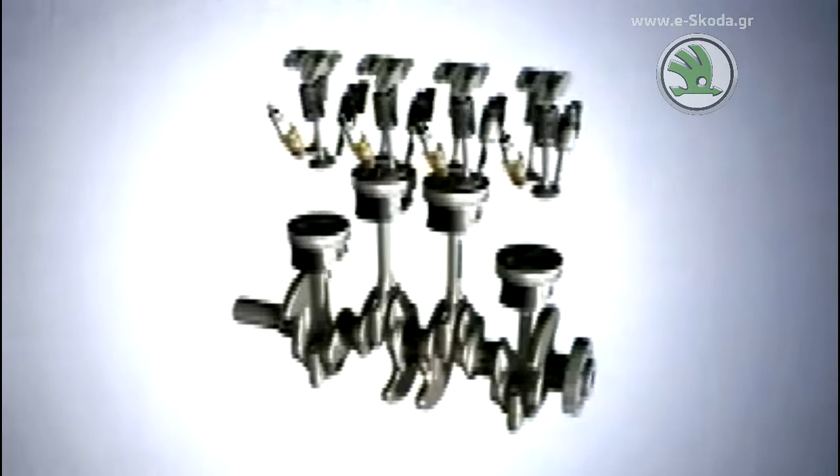Volkswagen's TSI engines, a spark of genius that has led to an impressive success story. And it continues with the 1.2-litre TSI engine with 77 kilowatts.

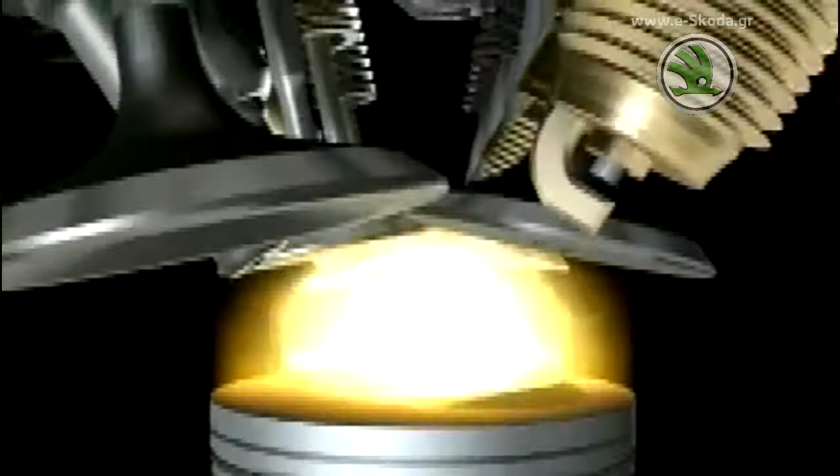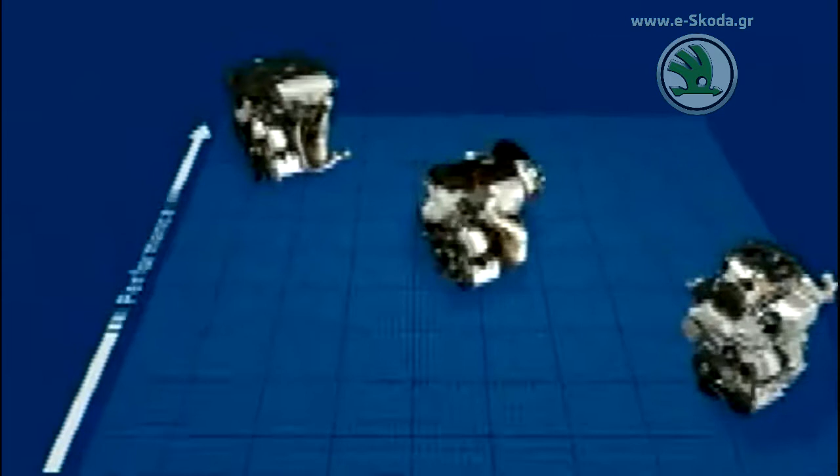High-torque engines with extremely low fuel consumption and minimal carbon dioxide emissions. It was by realizing this formula for success that the technological innovation from Wolfsburg achieved worldwide recognition in next to no time.

The 1.2-litre TSI engine with its output of 77 kilowatts now makes Volkswagen's technological revolution available for the entire range of Polo and Golf-class vehicles.

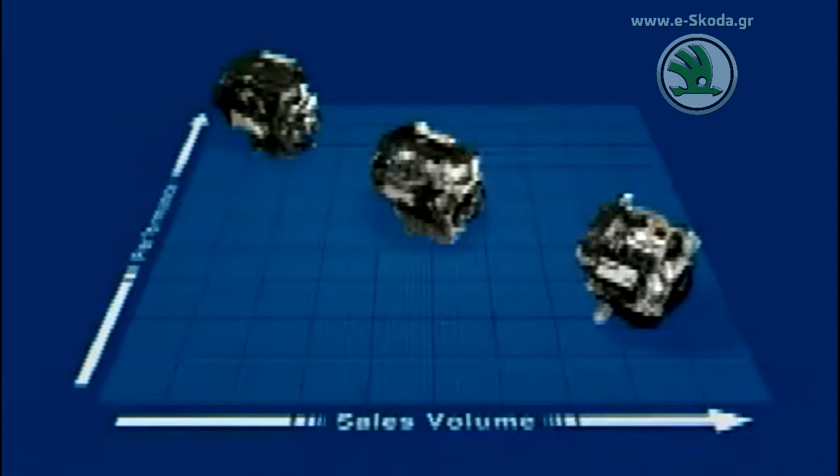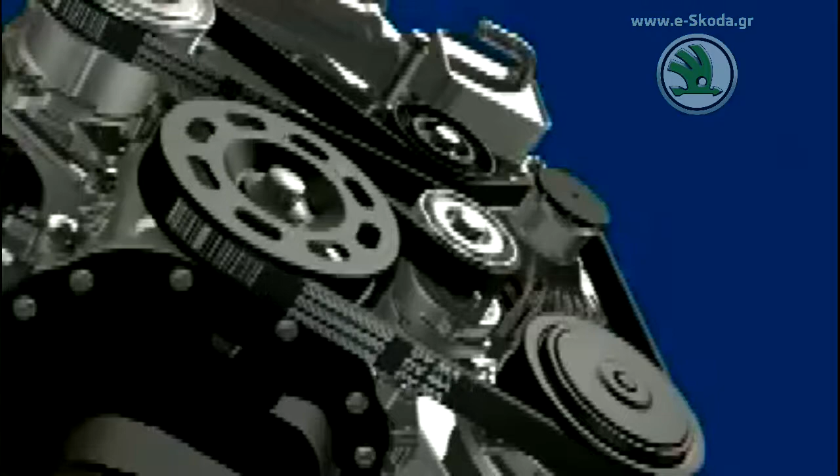In developing the 1.2-litre TSI from the small but powerful engine series EA111, Volkswagen's engineers focused rigorously on reducing frictional losses and on the use of modern lightweight materials.

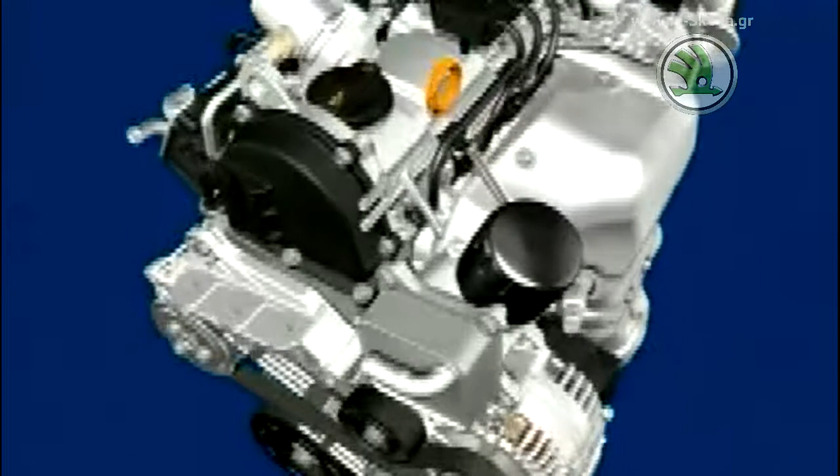The result was a new weight-optimized aluminium crankcase and a totally new combustion system. TSI technology design, which combines outstanding performance with fuel efficiency.

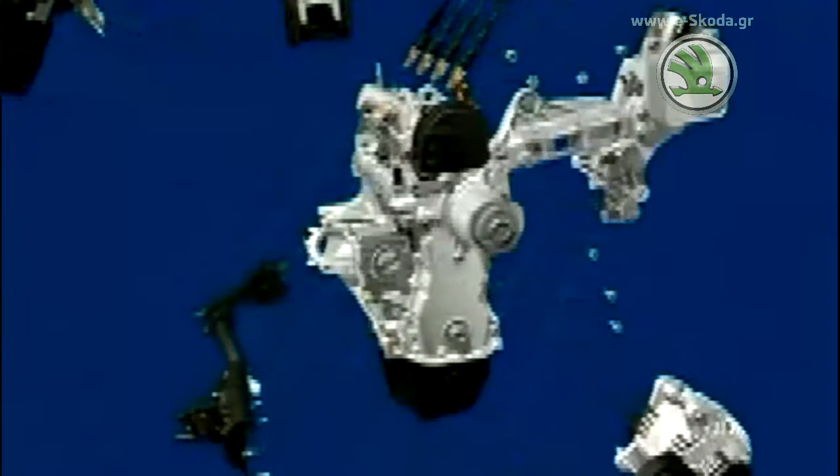The key innovations in detail: the new aluminium die-cast crankcase with innovative grey cast iron liners and an integrated oil separator system, for the first time also in a TSI engine by Volkswagen.

A revised timing chain case concept with two removable covers made of die-cast magnesium and plastic. The advantages: a marked reduction in weight, low system cost and low maintenance.

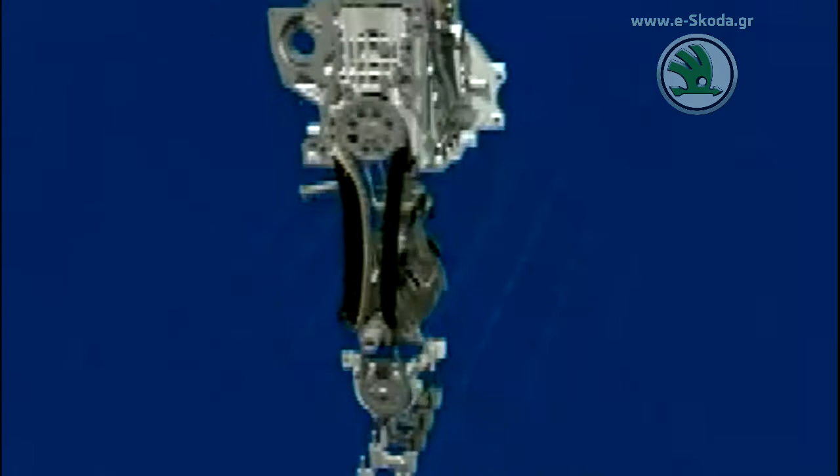Volkswagen's developers were able to minimize the engine's frictional losses by means of a range of innovative and intelligently complementary measures. In designing the new crankshaft, they resorted to the latest simulation technologies.

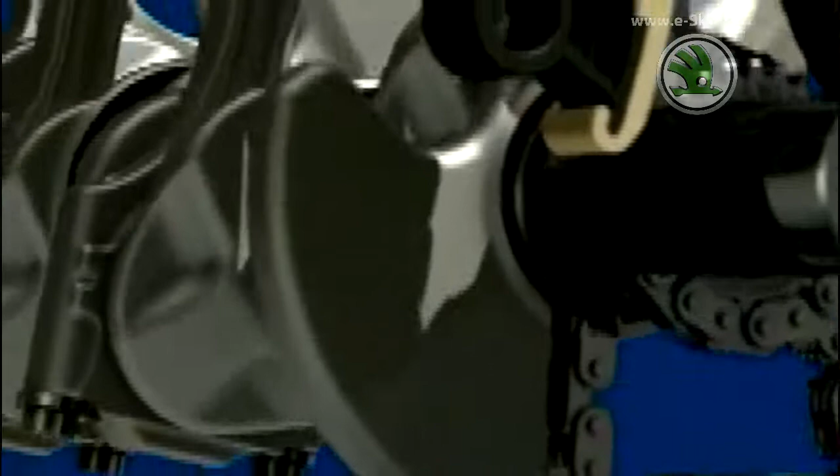This allowed the diameter of the main and big end bearings to be reduced to 42 millimeters. The result? Only minimal friction in the bearings. The optimal geometry and the decision to use steel led to a flexurally resistant crankshaft with excellent acoustic properties.

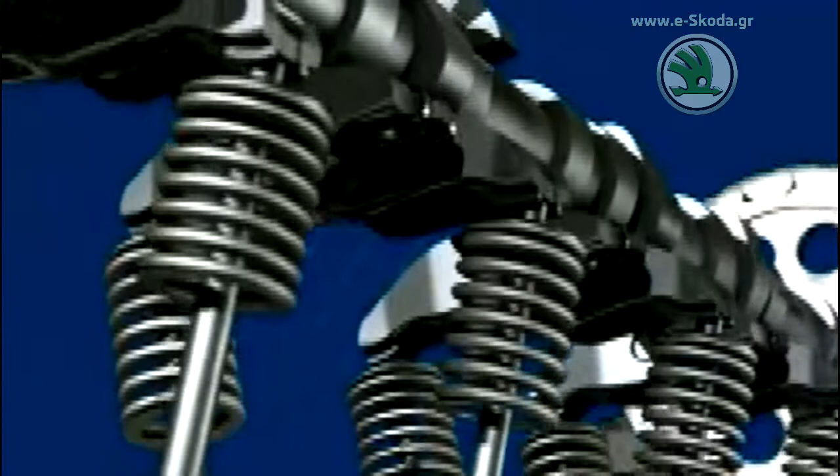The simplified 2V valve train with a single camshaft and small camshaft bearings permits a further reduction in friction, whilst ensuring optimal breathing efficiency for the small TSI engine.

Developing the world's first entirely new 2V direct injection combustion process with the typical response of a TSI posed a special challenge to Volkswagen's engineers.

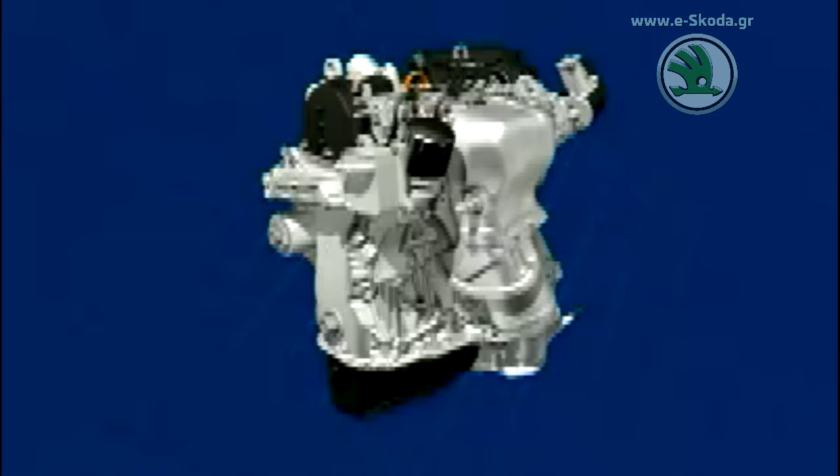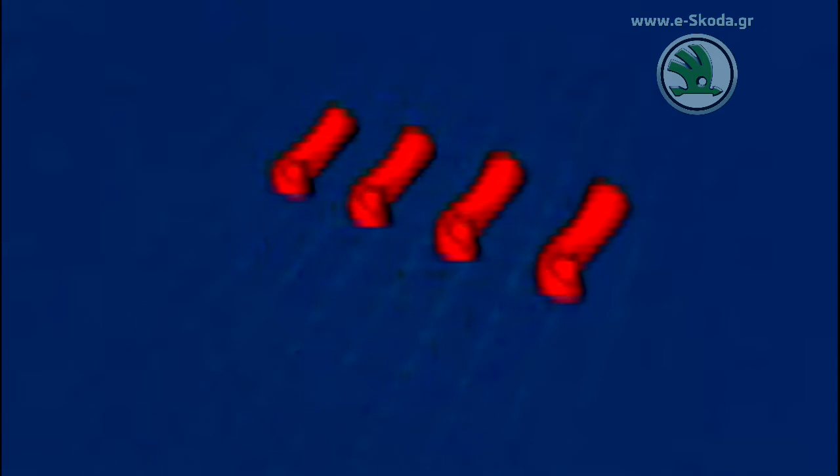First of all, they had to model the optimum swirl duct for an efficient swirl combustion process. Starting with a basic duct, 6 geometrical parameters of the intake port were continuously varied until the ideal values had been determined in terms of fuel economy, smooth running and emissions.

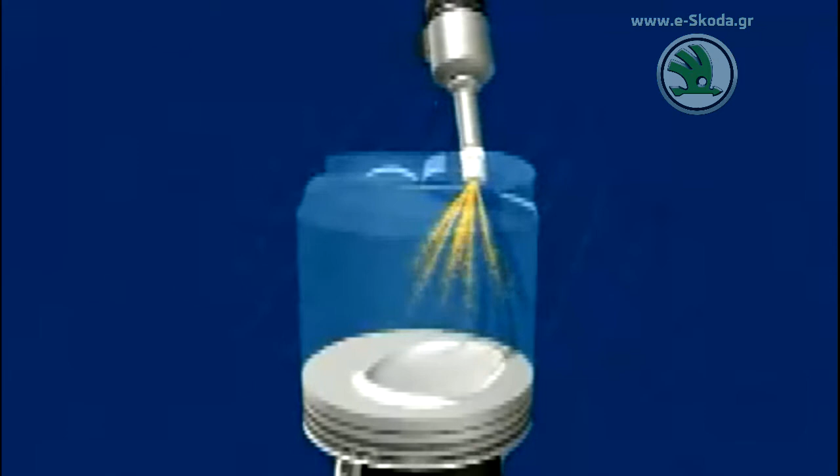The high-pressure injection valve, crucial for creating the ideal mixture formation. The latest generation of the multi-hole injector, with improved dynamics and more accurate volume control, ensures virtually perfect spray geometry while minimizing the injection time.

An innovative engine like the 1.2-litre TSI requires its designers to come up with innovative solutions in all areas, not least when it comes to the charging process.

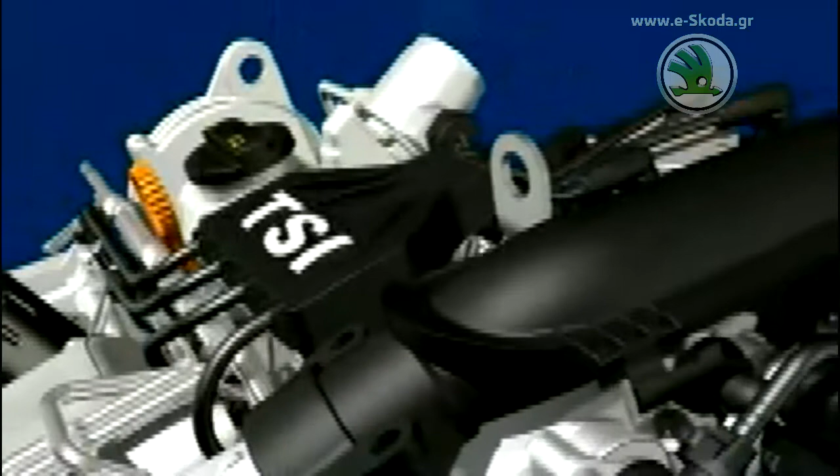The demands for the thermodynamics of the turbocharger are particularly high for the smallest in Volkswagen's TSI family, because of the ambitious fuel economy and performance targets.

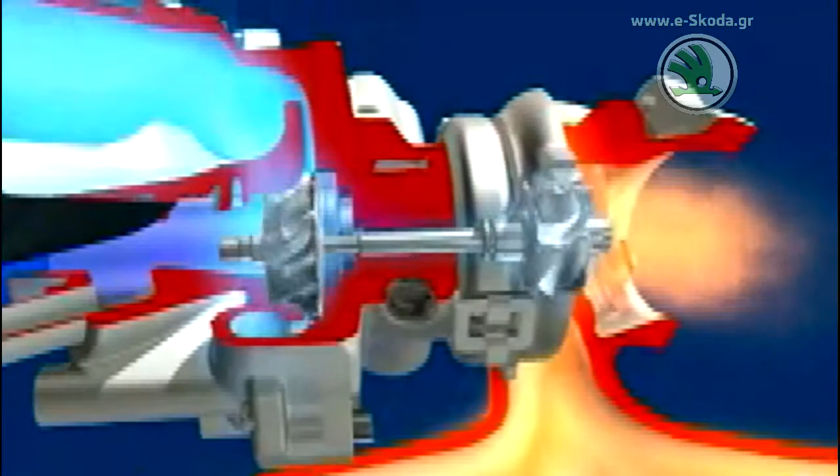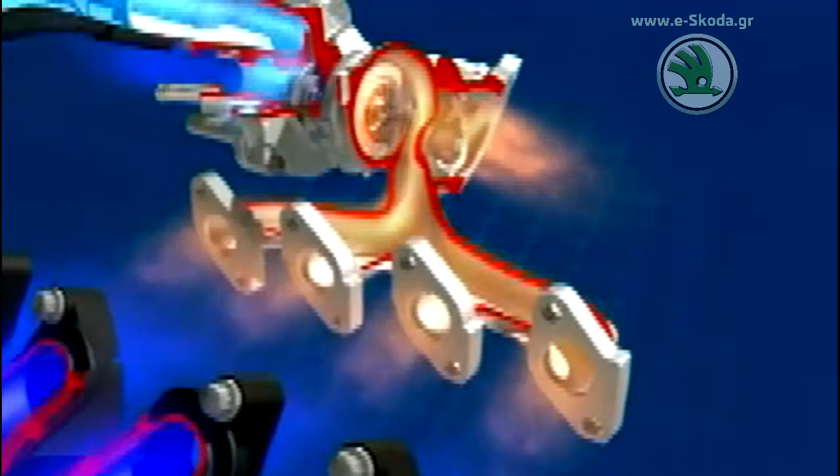At the turbine end, the developers opted for a mixed flow turbine with a low moment of inertia and high dynamic range of engine speeds. The single-piece exhaust manifold was optimized for minimum pressure loss and maximum utilization of the exhaust energy.

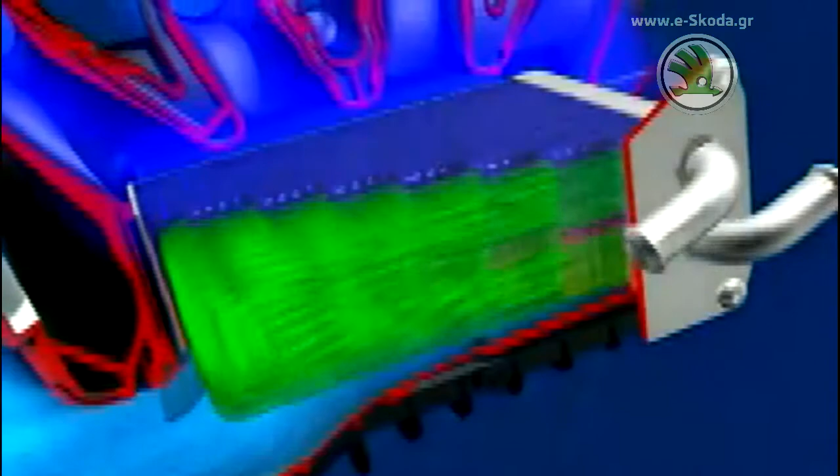On the engine's intake side, the water-operated charge air cooler, already successfully used in the 90 kilowatt TSI, has been employed once again. Reducing the volume of the charging device has further improved the turbocharger's responsiveness.

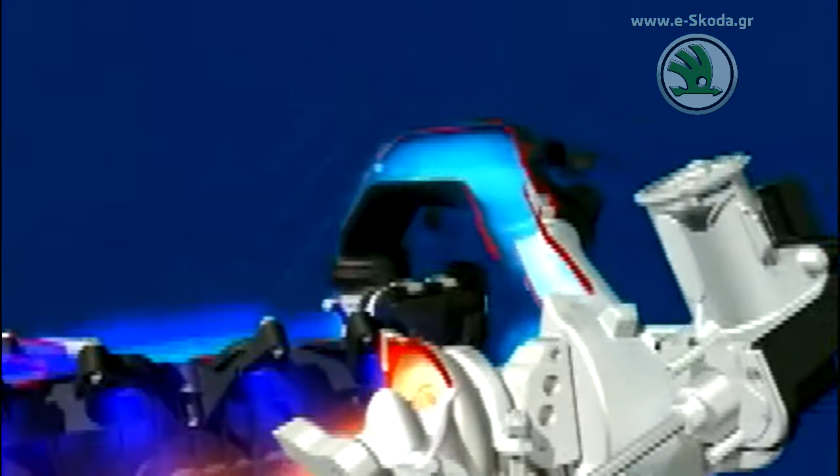In addition, an electric wastegate controller was developed for the first ever use in the high-volume series production of a TSI, in the 1.2-litre 77 kilowatt engine.

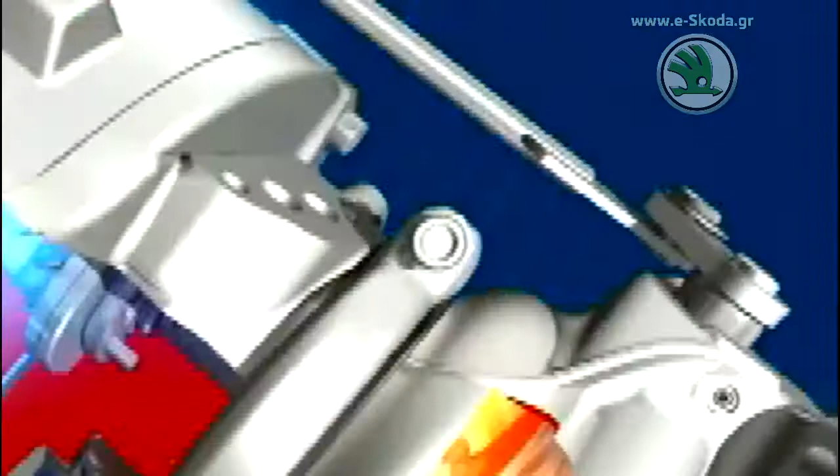Its key advantages are that no matter what speed the engine is running at, the wastegate flap can be set to any position, thus avoiding back pressure in the exhaust system and charge exchange losses.

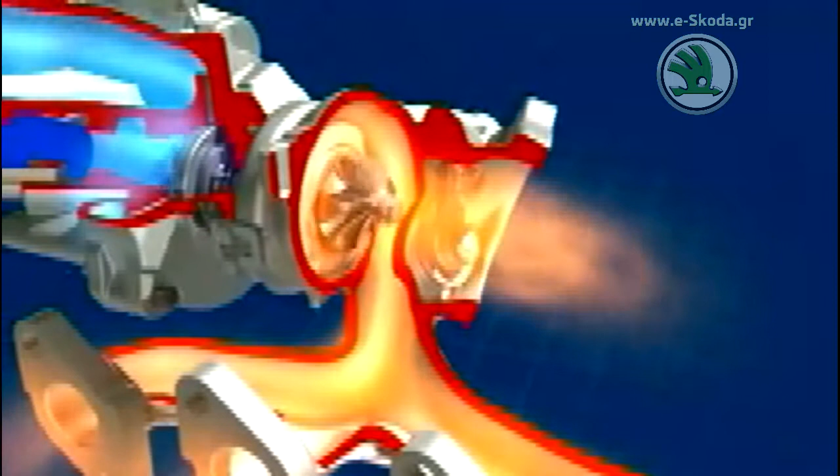Even when accelerating at full power, the wastegate can be kept securely shut, meaning that the charge pressure can be built up considerably faster.